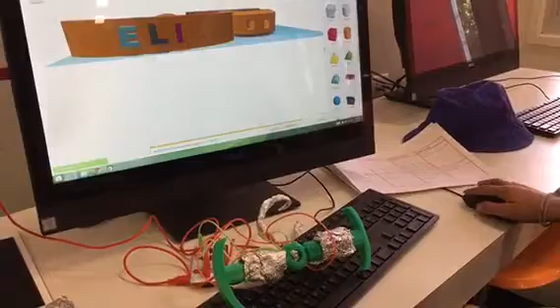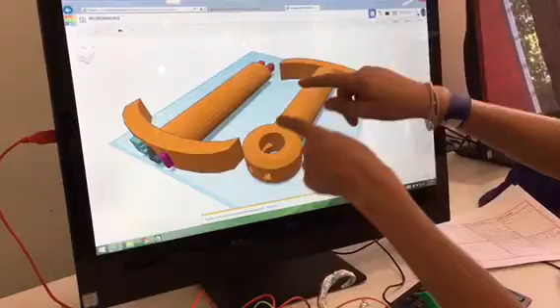Yeah, so I used Tinkercad right here. It's a website that you can use shapes like this. So I use mostly cylinders. We actually measured, because we first did these two connected, and it was just like that. But we ended up thinking that the handlebars were going to be about that big. So we split it up, cut it right here, as you can see, and put it on different hubs so they would be bigger. We expanded them and everything.

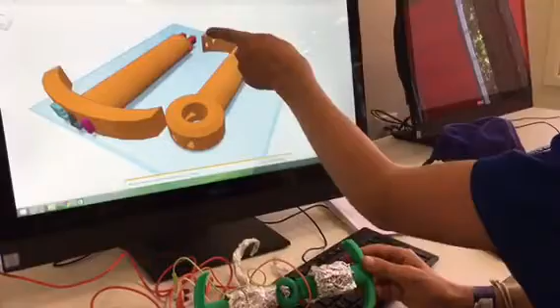The resulting 3D print job is just there in your hands. Yeah, so this is exactly what's up here. Now you'll see that on those two red things, they'll go into these slots. That's exactly what we did, and you can see in there, by the foil, that this part is connected into that, so that I can't bend it, otherwise it might snap. So it's pretty fragile, but it will be able to be used as a game controller.

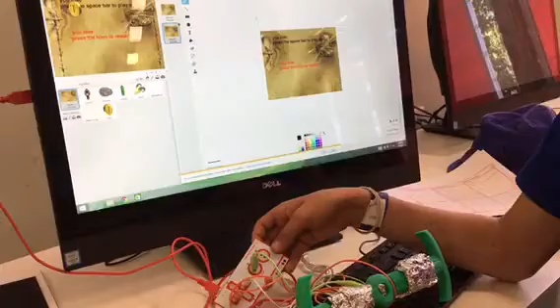And that you connected what we call a Makey Makey from your controller to the computer. So can you explain that? So this is a Makey Makey. This is a space bar. So I coded that if I touched the space bar, the whole thing would restart. So I connected that to the horn because you see how it says you lose, press the horn to restart. So I put that right here.

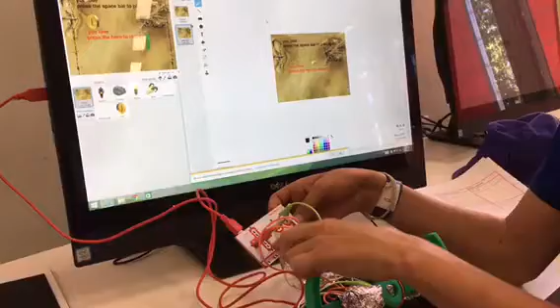Now these are the two left and right. I don't have up and down because you don't need that. So in order for me to actually get this game to work, I have to earth myself, like I have to connect myself to the computer. And that's right here, see? So I've got this little cord going from here into the Makey Makey, then eventually out onto this cord up to the computer. So you've earthed yourself, and then you've got the circuit.

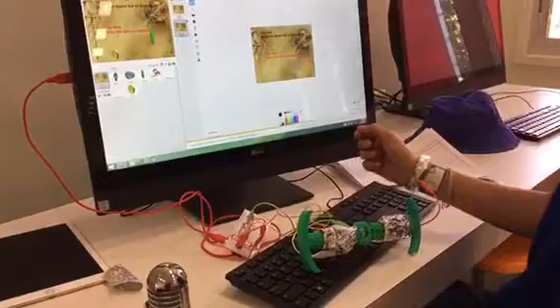Yep, completed circuit. So as you can see, when I touch these, the foil, this will move the guy this way, and this will move this way. Alright? It's hard to get the hang of this.

Did you enjoy this project? Oh yes, I really enjoyed this. What do you think made it so enjoyable? I had never actually used Scratch before. Oh, this was your first time. Yep, so it was really fun for me to learn something else.

Like the fact that you had designed and built your own game controller as well. Yeah, that was one of my favorite parts. I really liked how the 3D printer did everything. That's great. Well done, Elias. I think that's a very exciting project and a really great solution that you've worked on.

So Elias is heading home with his kit to show Mum and Dad and the rest of the family his completed project. So show me what's in there. So I just got my planning, the Makey Makey, and my favorite thing, the 3D print. And then you'll just open your Scratch file at home and connect it all up. Yep. That's excellent. You proud of yourself? Yeah.